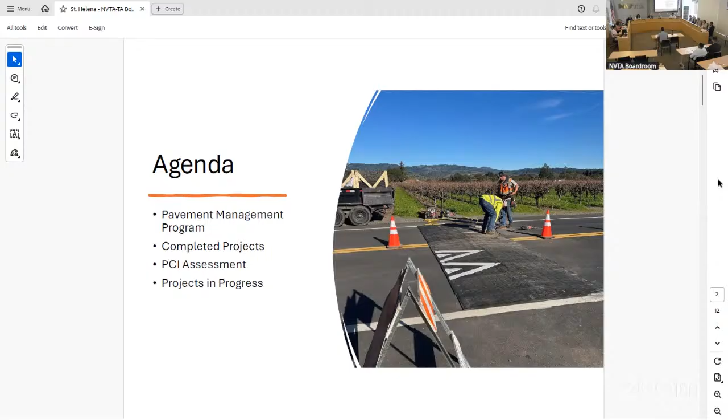Next slide please. Our pavement management program: in 2024 and continuing in 2025, we had a major reboot of our pavement management program, which has allowed us to complete a significant quantity of streets. The approach focused on alternating years of pavement overlay versus maintenance treatments. We've also helped our staff have a more robust maintenance and crack sealing operation, which is assisted. As we're moving forward with our pavement management strategy, we're moving out of a pavement crisis phase and looking forward to the future, utilizing Measure T, Measure U for significant projects other than just pavement, including Class 1 trails, storm drain infrastructure, and bike and ped facilities.

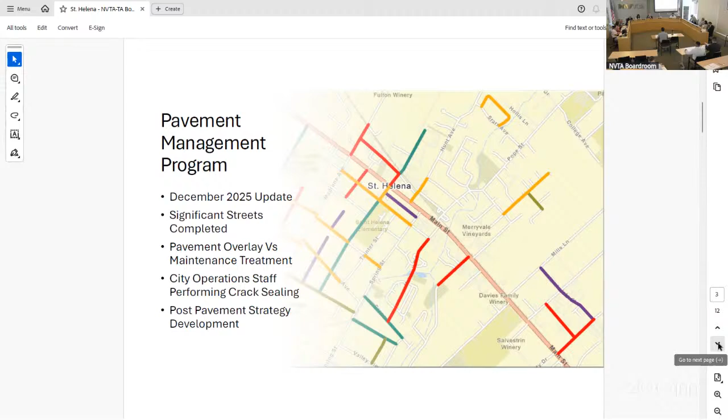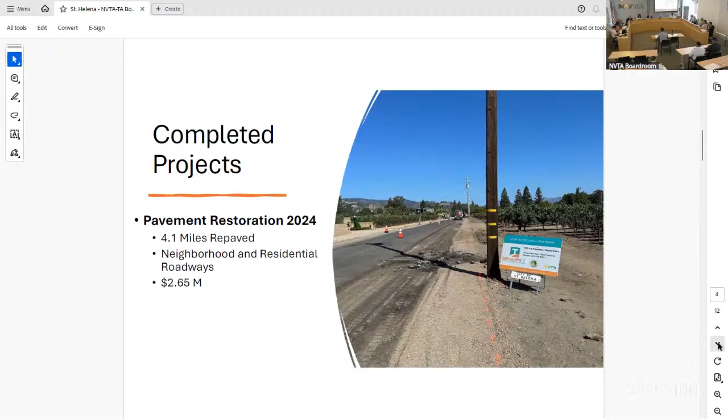Next slide please, completed projects. In late 2024, we completed our annual pavement restoration project. This was a pavement-focused year. We completed 4.1 miles of resurfacing within the city. We tackled quite a few neighborhoods as well as major arterial streets, and we focused on streets that had condition gaps within them. Altogether, the project was $2.65 million. Next slide please, here's a couple of pictures from that project as well.

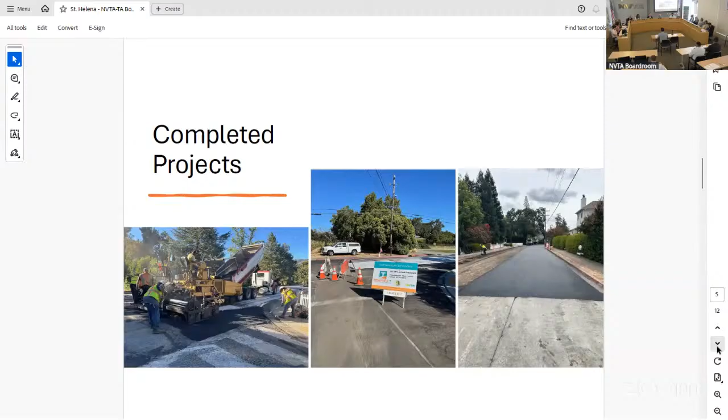Some of our significant streets: Hunt Avenue, Spring Street, amongst others. Next slide please. Another project we completed was our downtown sidewalk paver repair project. This project included removing and resetting all the pavers through our downtown corridor that had been uplifted due to tree roots, and that project came in at $365,000.

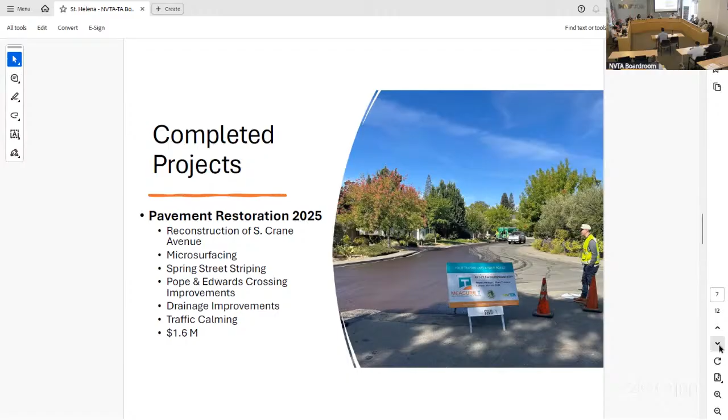Next slide please, we just completed our 2025 pavement restoration project. This was a more maintenance-focused project. The centerpiece of the project was the reconstruction of South Crane Avenue, which had not been resurfaced since the 50s, 60s. We expanded the roadway, added bike lanes. It was a really fantastic project. We also microsurfaced significant neighborhoods in town. We completed some striping projects, some pedestrian crossing improvement projects, and drainage components. It was kind of a big catch-all project. And we also deployed, for the first time in the city, traffic calming measures - speed humps throughout the city as a pilot program. This project was $1.6 million.

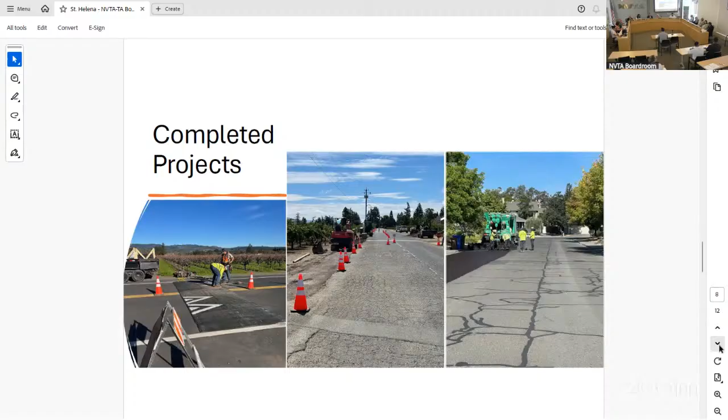Next slide please, here's a couple of pictures from the microsurfacing efforts, our South Crane Avenue resurfacing, and then our speed humps as well. Next slide, our pavement condition: we've had a significant increase from the beginning of 2023 till the end of 2024. We increased from 47 to 65. This was following our re-strategizing of our pavement management program. And last year, we actually were cited as most improved in the nine counties for an 11-point increase from 52 to 63, which we're excited about. Our targets are 75 to 80, which we do see as possible within the next few years.

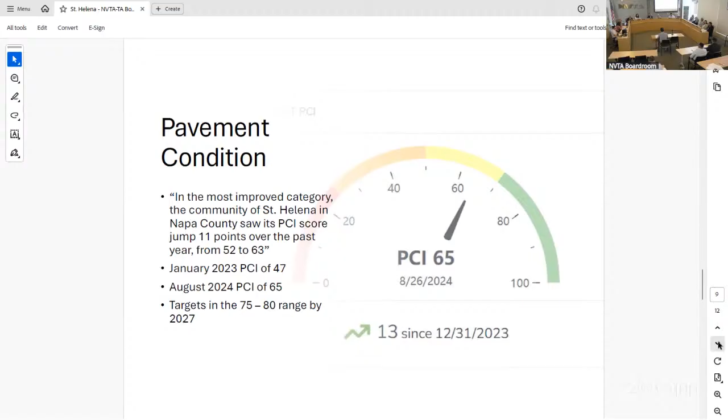Next slide please, projects in progress. We have some significant projects happening currently. We have broken ground on the downtown sidewalk rehab project, phase 1A. This is replacing the downtown sidewalks from Pine Street to Adams. This is going to include new curb, gutter, sidewalk, trees, furniture, infrastructure.

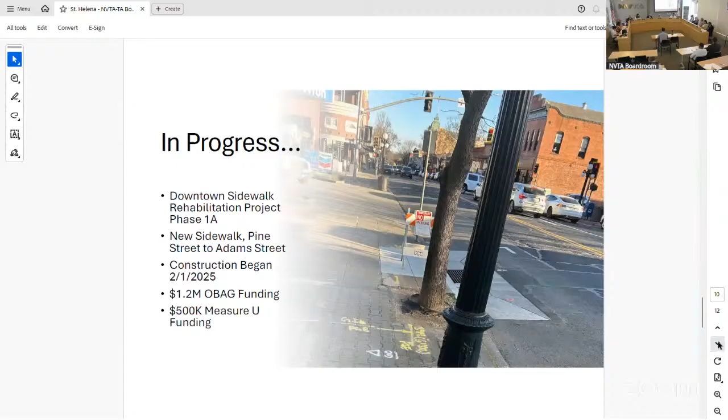And this project is primarily funded through OBAG, but with a contribution from Measure U of about $500,000.

We have a few projects that are shovel ready that we are preparing to move forward. We're currently installing new utilities on Oak Avenue through the whole corridor in preparation for a surface project, which will repave the road and replace curb, gutter, and sidewalk. This project will also coincide with the impending Vine Trail corridor through St. Helena. We are making preparations to possibly progress the downtown sidewalk rehab project, phase 1B, which will replace the sidewalks from Adams all the way down to Pope Street. We were encouraged by the cost we got from phase 1A and are looking at the feasibility of moving that forward. We're also going to proceed with a 2026 pavement restoration project.

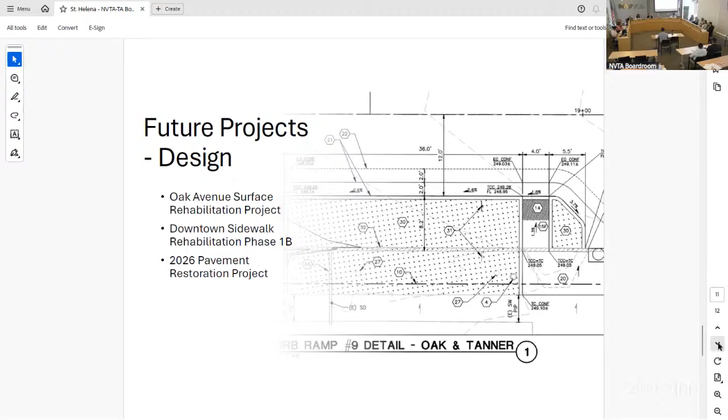Thank you for the report. Does the board have any questions? Yes, maybe I do have a question. First, I want to congratulate you on getting the PCI score up so high. I'd love to see that happen in the county. That's a big movement, big progress on your part.

You said you re-strategized your pavement program. Can you give me some of the key indicators that you found helpful? Certainly. For years we relied significantly on PTAP and the PTAP analysis, our street saver analysis. Working with that, adding extra review, and then having people who live in the city and work in the city speak into those models, we were able to take the computer model and work it more than we had in the past.

I'm just wondering if there's something other jurisdictions can learn from that, since we were able to achieve so much. And then, as I said earlier, we're grouping our maintenance projects, including microsurfacing, concrete repairs, and drainage repairs, into one project, and focusing mainly on overlay with as minimal concrete or extraneous work as possible during those pavement years, really utilizing the money for as much asphalt as possible.

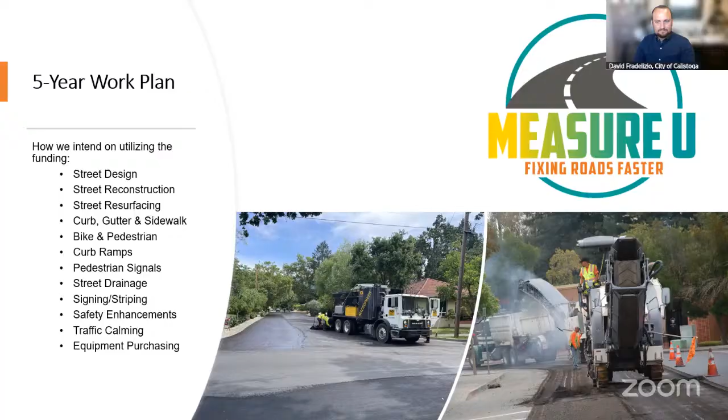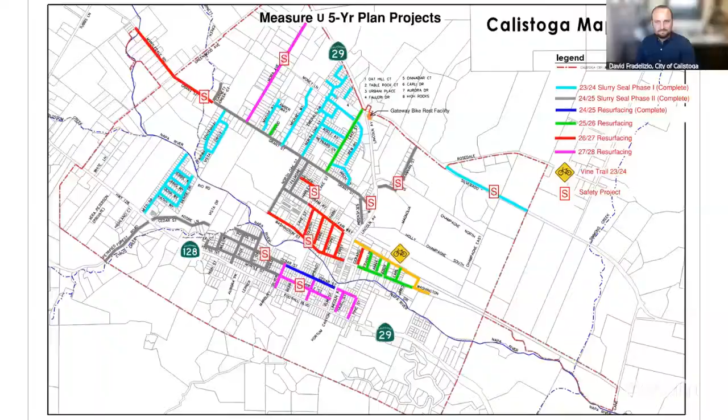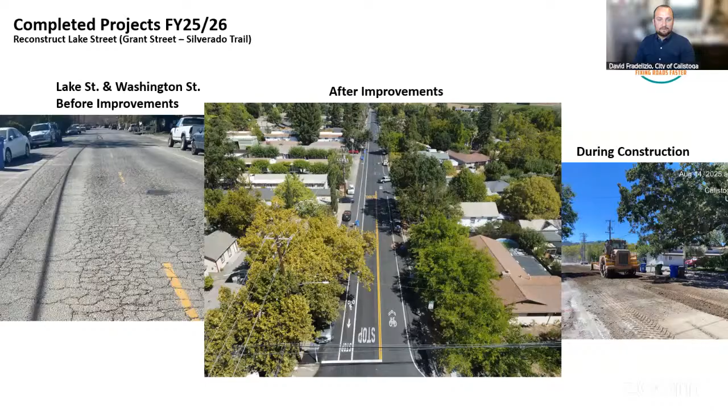We have reported about $400,000 of Measure U funding on this project, with a total project cost of $1.5 million. Projects like this are a good example of how Measure U funds help us address streets that have reached the end of their useful life. Next slide, please.

Next slide, please. In addition to Lake Street reconstruction, several other projects were completed this year. These include 2-inch grind and overlays on 6 road segments, installation of a flashing pedestrian beacon and crosswalk at Brannan and Lincoln Avenue, as well as design work for future roadway improvements. These improvements support both transportation safety and mobility, particularly for pedestrians and cyclists. Next slide.

Looking ahead to fiscal year 26-27, we're planning several potential projects. The primary street reconstruction project will likely either be Grant Street between Centennial Circle and the city limits, or Washington Street between 3rd Street and North Oak Street. We have 100% design plans for both of these projects, but final prioritization will depend on City Council priority and funding availability as we go through our budget season.

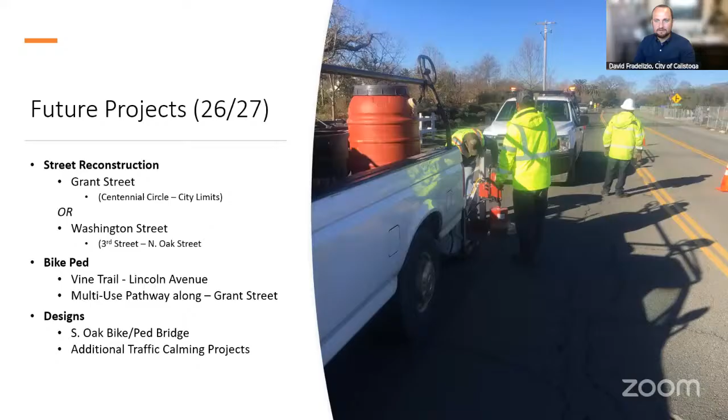For fiscal year 27-28, the city is planning the first phase of a larger pavement overlay project, and we're planning to use the Measure U bonding option to fund these phases. These phases will include overlay improvements on 15 streets. These types of pavement preservation projects are important because they allow us to extend the life of our streets and avoid the more costly full reconstruction earlier than it needs to be. We're also going to be considering pavement reconstruction work on Mora Avenue during this fiscal year, depending on how much is accomplished between Grant and Washington Street in previous years.

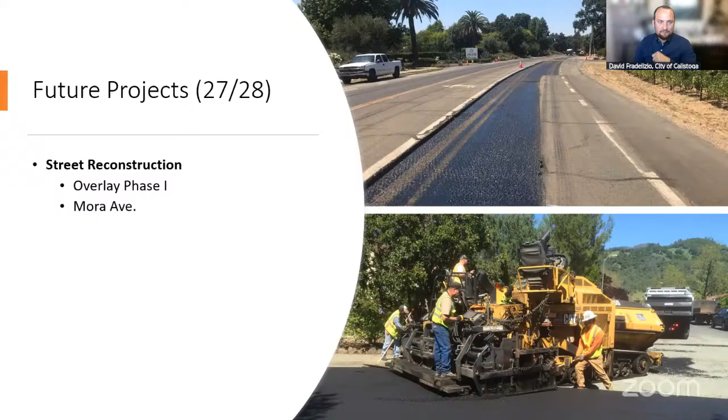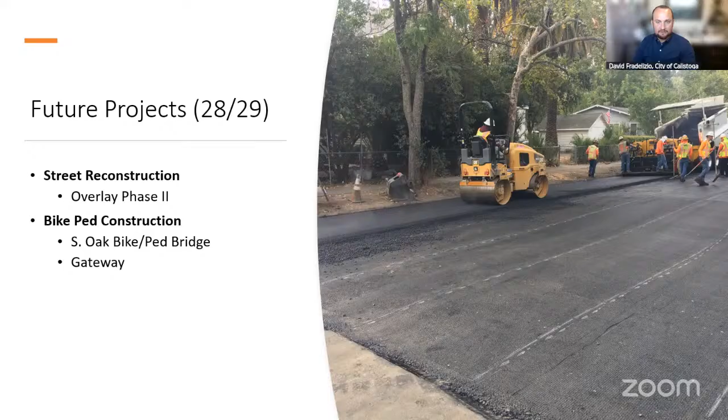And finally, for fiscal year 28-29, we'll be looking at the second phase of the pavement overlay project, construction of the South Oak Bike and Pedestrian Bridge potentially, and a potential gateway project, which we have 100% design plans for currently. These projects will help improve connectivity, safety, and the overall transportation network in Calistoga.

And last slide, please. So in summary, Measure U funding continues to provide an essential resource for maintaining and improving Calistoga's transportation infrastructure. The program allows us to address aging streets, improve pedestrian and bicycle safety, maintain ADA compliance, and plan strategically for long-term infrastructure needs. We appreciate the Napa Valley Transportation Authority Board of Directors and their continued oversight and support of the program. Thank you for your time today, and I'm happy to answer any questions if you have any.

All right, thank you. Does the board have any questions or comments? All right. Oh, Director Alessio.

If no one else is going to say anything, again, I want to commend Calistoga Public Works Department for the work you're doing in terms of increasing the PCI score and also being mindful about what I'm hearing and seeing is that we're all kind of on the same page about creating safe communities, multi-mode communities. And at the end of the day, we know that quality roads create happy residents, right? Or happy roads, happy residents. So again, thank you for the work. If I understand correctly, or remember correctly, I think St. Helena's PCI was at 65 and Calistoga 69. Okay, so the race is on. We'll have to see how the other jurisdictions are doing. So thank you and great job. Thank you very much. All right.

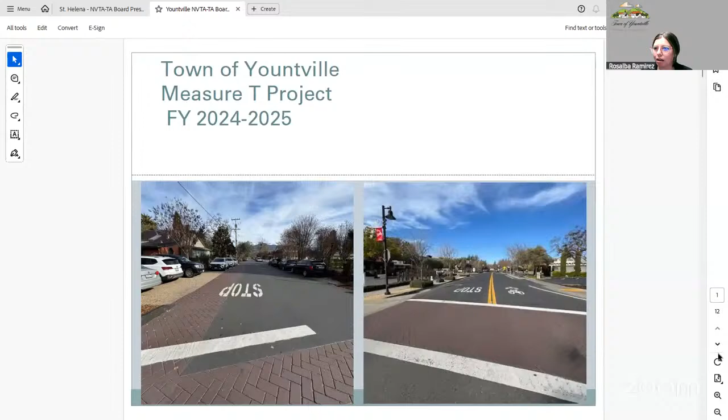Good afternoon, board members. My name is Rosalba Ramirez. I'm the Deputy Public Works Director for the town of Yountville. As soon as I can see the presentation, I will go ahead and get started. And I'll start presenting on the town of Yountville's official last Measure T project and kind of go over our plan for the future Measure U projects. Okay. Let's see, I think it's still, all right, I can officially see it now.

So this first slide, our last Measure T project, the last road rehabilitation project we completed this year was for Washington Street, from Yount Street all the way to the north town limits, and Webber Avenue, the full length, which is Vine Trail to Yount Street. On the Measure T 5-year list or plan that gets approved, both streets are split up into different segments, but because Washington Street is the main street in town and Weber Avenue, where it crosses Washington, it's such an active intersection, we decided to move forward and do the entire street as one project. So we were able to incorporate the various segments that are listed in the 5-year Measure T plan.

Before we started this project, Washington Street's various segments had varying PCI ratings. It was in pretty bad condition overall, with an average PCI of 65. Weber Avenue's two segments were in very poor condition, one side at 29 PCI and the other at 52.

At the end of the project, this pulled our town-wide average PCI rating for our entire roadway network to 82, which is the goal for both our Measure T and Measure U projects: rehab the lower-rated PCI roads first so they fall into maintenance, bringing up that overall PCI. Our goal is to maintain definitely above 80, ideally around 82.

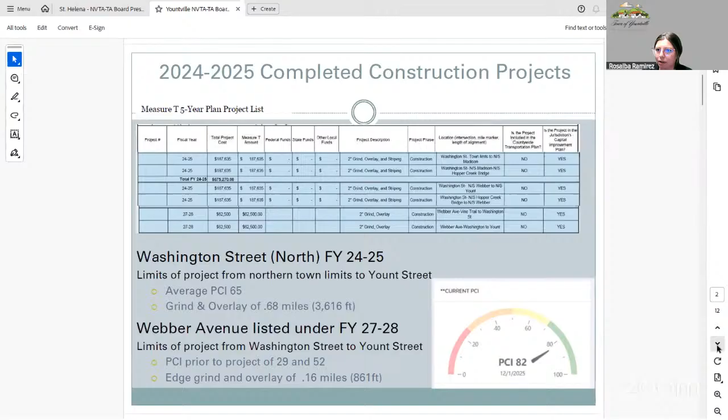The Washington Street rehab for Measure T was part of a larger project we call the Washington Street Corridor. It was the largest project we've had in a handful of years, even larger in scope and cost than the south side of Washington Street from Yount Street to the southern town limits.

For the Measure T rehab project alone, the work came to just over 1.2 million at the end. We did a standard advertisement, and the low bid came from a company called Goodfellow Bros. The project moved pretty quickly, and we were done about October 30th.

We did use other funds besides Measure T. We'd spent the last couple of years building up our reserves because we knew that if we did Washington Street, we wanted to get it done in one go, since all of our businesses and hotels are primarily on Washington Street. We used just over 1.1 million in Measure T funds plus additional general funds.

In addition to the roadway rehab work, we did some sidewalk, curb, and gutter work in advance of the project using SB1 funds and other general funds as well.

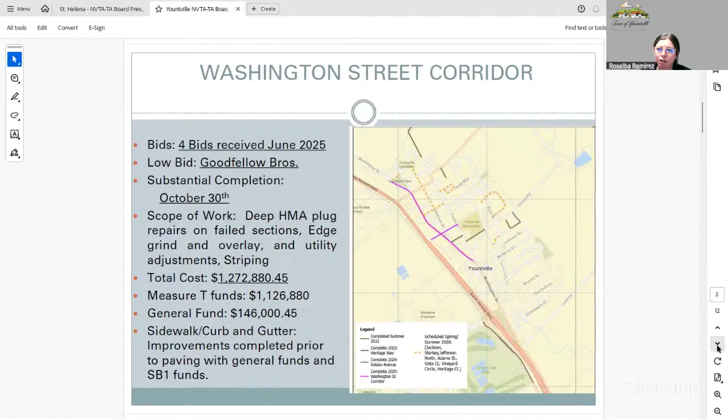Some construction highlights I want to touch on relate to our approach. Yountville isn't very large, and Washington Street is our main street, so we told the contractor that whatever segment they ground out had to be paved back that same day, to reduce disruption to businesses, hotels, and tourists.

They came back with a very quick schedule and were able to finish the entirety of Washington Street and Webber Avenue within five shifts, three days and two nights. For the night work, we coordinated with business owners to make sure it wasn't disruptive to hotel guests.

It was very impressive to see. Some businesses were amazed by the construction train, the grinding equipment up front and, not far behind, the paving equipment, so by the end of the work shift there was new drivable pavement.

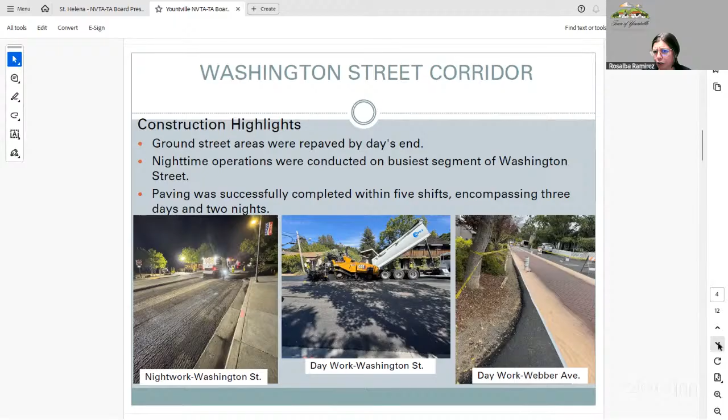These are some before and after pictures, showing just how bad the street was. Weber was significantly worse than Washington Street, shown top left, with the after photo just below it. We also show the red brick, what we call an advisory lane, which I'll touch on later; that was incorporated into Weber Avenue.

For Washington Street, I tried to capture photos of some of the areas that were pretty bad, so you could see how well the rehab brought the PCI up. Next slide, please.

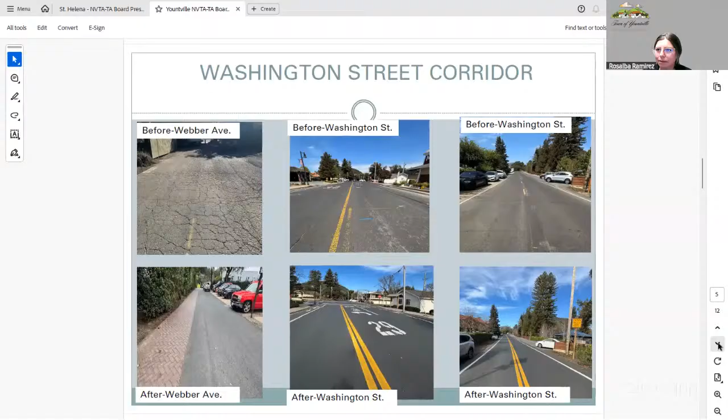So part of the Washington Street corridor project, which was the full rehab and sidewalk work, we closed some sidewalk gap closures. The biggest one was on Washington Street just south of Madison, in front of 2 businesses that have been there a long time. There was existing sidewalk just north of Pedroni, then a big gap in front of these 2 businesses, and sidewalk again just south of Madison.

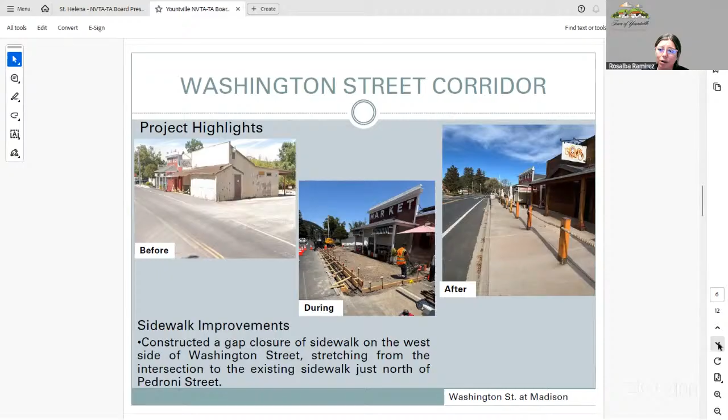So we went ahead and built sidewalk with the idea of inviting outdoor seating areas for the businesses, with standard curb and gutter. Because the businesses were older, we had to adjust the sidewalk in front of one of them since that building was significantly lower to accommodate drainage. So there's a transition where the sidewalk goes down, meeting ADA compliance and solving the drainage issue. We fixed that gap closure ahead of the paving project, so we're able to pave up to that new curb and gutter.

Some more project highlights, focusing on the corridor project. On the Weber side, you see the advisory lane there - it's the brick pattern Yountville has on crosswalks throughout town, a stamped brick pattern.

We created a pathway connecting from the Vine Trail down Weber, across the intersection of Washington Street, and onto Yount Street, to encourage pedestrians to use the Vine Trail and locate the center where Town Hall is - the Town Hall and new Yountville Commons amenities. Weber's not very wide, so this helps with the traffic we have there - a lot of vehicle, bicycle, and pedestrian traffic.

On the Weber and Washington Street intersection, it was a 2-way stop. We implemented a 4-way stop to allow for access on the advisory lane. There's a park right there in the corner, Van de Leur Park, that's also widely used. That's an improvement we're seeing a lot of benefits from at the moment.

We also put in additional sidewalk on Washington Street adjacent to the French Laundry Gardens. There was previously an existing asphalt pathway that wasn't in great shape and was no longer ADA compliant. So we put in standard curb and gutter on that section and sidewalk raised up to the top of gutter elevation. In one of the photos, you can see it's already widely used by tourists and residents.

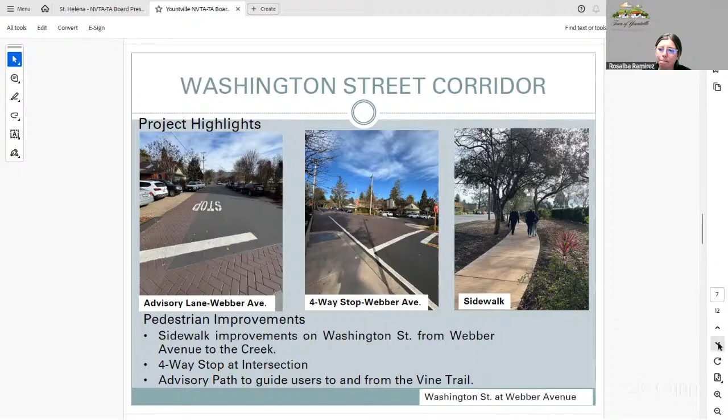As you go south, we started putting in sharrows to encourage bicyclists to use the roadway instead of the sidewalk, reducing conflicts between pedestrians and bicyclists. On Madison, although not on Washington Street or Weber, we were able to create buffer lanes to help those using Madison from Washington Street to Yount Street, then to Yountville Crossroad or Yount Mill Road, where we see a lot of bicycle activity as well.

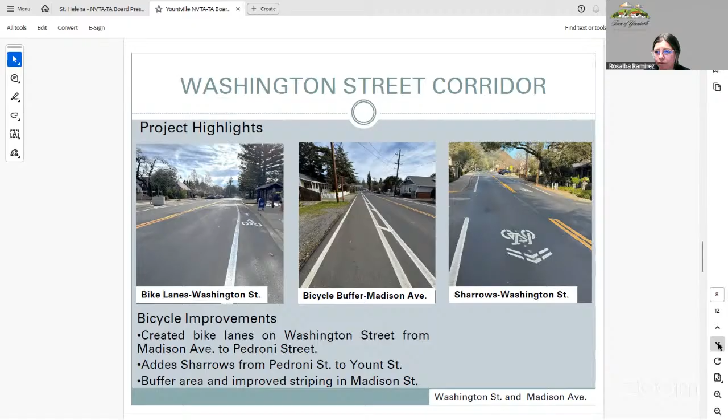Our upcoming Measure U list takes a similar approach to our Measure T, where we try to get the lower PCI rated streets rehabbed and those PCIs brought up, so we fall into more of a routine rotation of maintenance for our streets. However, we want to make sure any utility improvements or development projects we have going on don't conflict - we don't want to rehab a road if we know there's going to be construction in the roadway.

This upcoming year, we're doing some microsurfacing of streets so we can better analyze those larger streets and make sure we do roadway improvements after any other construction improvements happen. Again, the goal is to maintain that 82, definitely above 80, possibly higher PCI for the entire roadway network.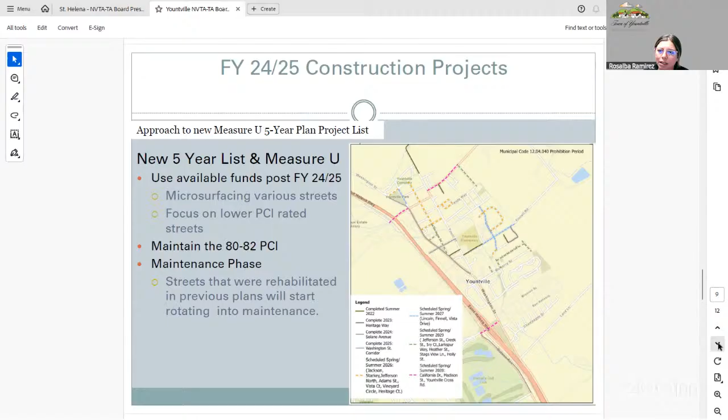This is probably not readable, but it is our full 5-year Measure U project plan list. We have a handful of micro-surfacing streets we want to get done within the next few months. We might have to swap out a few streets for ones later in the years just to avoid construction conflicts, but we plan on proceeding with the projects listed here in this order as best we can.

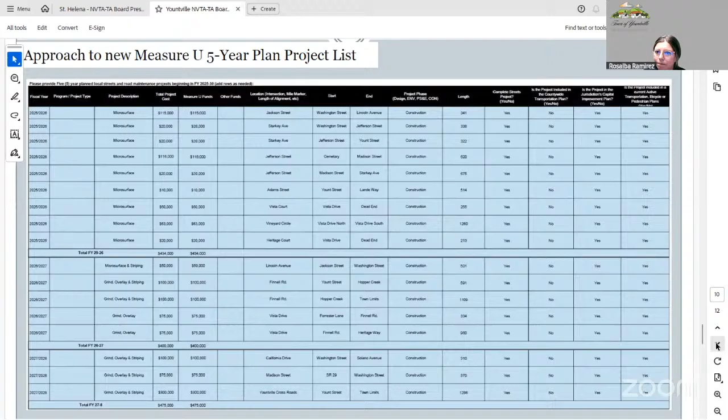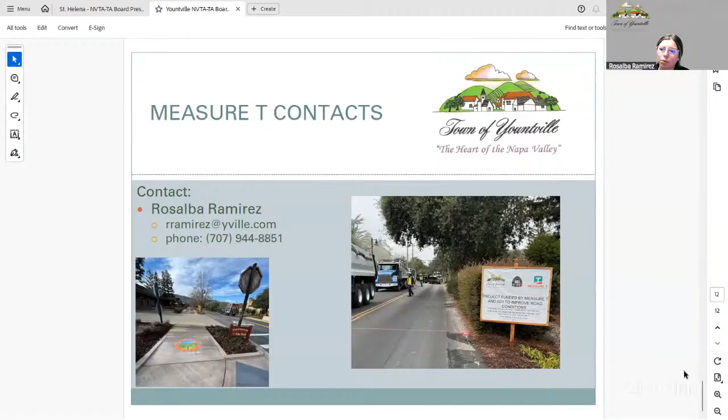Really quick, one of the photos here shows we put a Vine Trail logo on the sidewalk at Madison and Washington Street to help guide people to the Vine Trail entrance right on that corner. We're still trying to encourage pedestrians and bicyclists to find different ways to highlight those entrances, both on Washington and Madison, and Washington and Weber. Thank you.

There was some question about having a race for the best PCI results. I kind of think the town of Yountville won, but it's not over yet, we're not at 100. So thank you for the report. I'm probably providing you with a poor version of a compliment over how well you've done with your roads.

Thank you. Are there any questions? Yes, Director Reed. On that note, I just wanted to congratulate our Public Works Department and especially Deputy Director Rosalba Ramirez, because she pretty much made sure these projects came in at budget and on time. Actually, the timing of these projects was her idea, and it came together quickly. We were all sort of steeled for the Washington Street paving especially. So the job she has done for us has been very appreciated by all the residents and businesses. Thanks. Okay, thank you. Any other comments? All right, thank you again for the report.

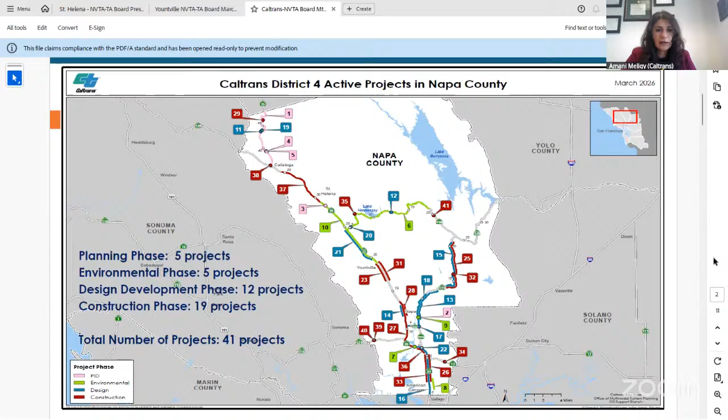I'm reporting the status of this emergency director order, which is the sinkhole culvert scour repair on State Route 29. This was based on recent communications between the board members and elected officials with teams from Caltrans to address concerns from the community surrounding the project limits due to the current daytime one-way traffic control.

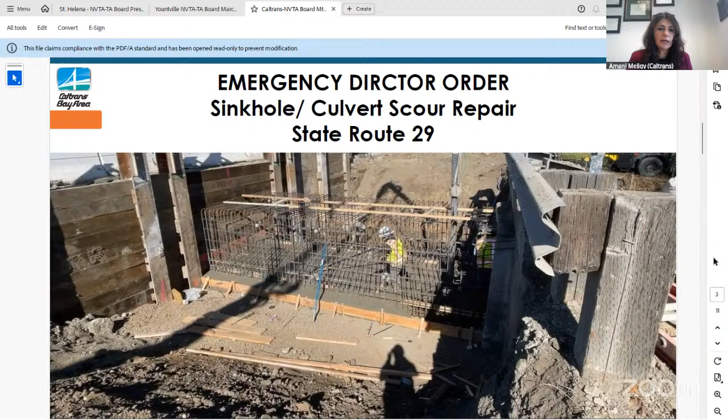This director order project is located in Napa County on State Route 29, midway between Oakville Cross Road and Rutherford Road and State Route 128. The Caltrans District Field Maintenance identified a dip or depression in the roadway at post mile 23.54, and reported it to the District Maintenance Division. This was on September 10, 2025.

The nature of this work is an emergency need for this director order to eliminate any potential failure of the culvert in this section of State Route 29, with the risk of long-term full closures if this is not rectified.

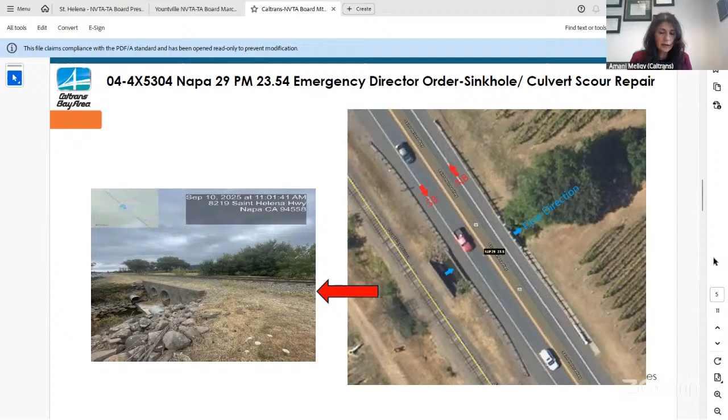The photo on the right shows State Route 29 with northbound and southbound lanes. Currently for construction, we are in stage 1 of culvert repair. The northbound is closed for construction, while the southbound is used for reverse traffic in both directions. The photo on the left shows the collection basin that collects water going to the culvert underneath the roadway, flowing from upstream to downstream.

These pictures were taken in September 2025 and show the extension of the scour damage at the north side and south side of the culvert. This is due to erosion of the soil around and underneath the foundation. You can see this void caused a deficiency in the structure with potential for collapse of the culvert.

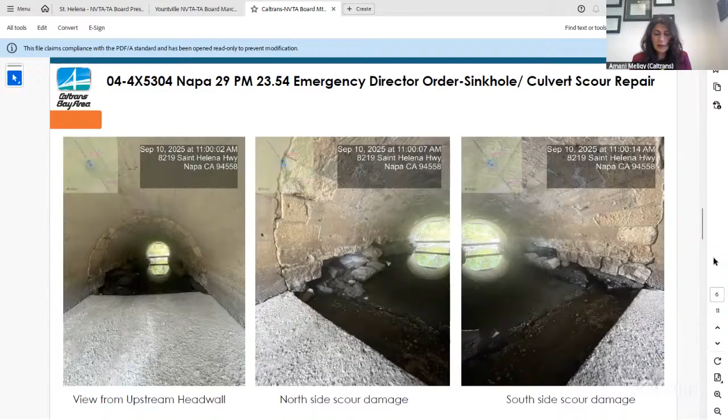However, in February, after dewatering to lower the water level in the culvert, PG&E was not successful in abandoning or cutting the gas line and had to revisit their plans. They later managed to successfully remove or abandon the gas line. This was the first constraint for construction.

The second constraint was the weather condition at the beginning of the year, with heavy rains that stopped construction because they needed three consecutive days to construct the sheet piles and the K-rail.

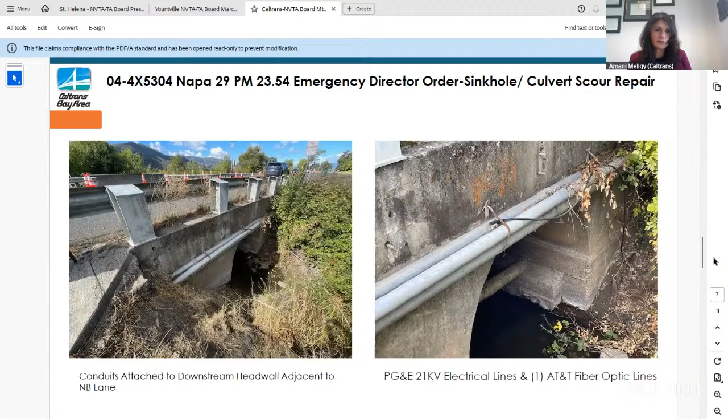This director order is in the amount of 1.9 million dollars, funded from the SHOPP emergency opening funds, with a total cost of 2.8 million. There may be a request for supplemental funds if this amount is not sufficient. Construction began January 12th of this year, with tentative completion by May 21st. The scope is replacing the existing 8-foot diameter arch culvert, built in 1953, with a cast-in-place 8-foot diameter concrete box culvert.

This work is currently ongoing, and the traffic advisory, which was sent yesterday, shows that the work will be completed by March 24th.

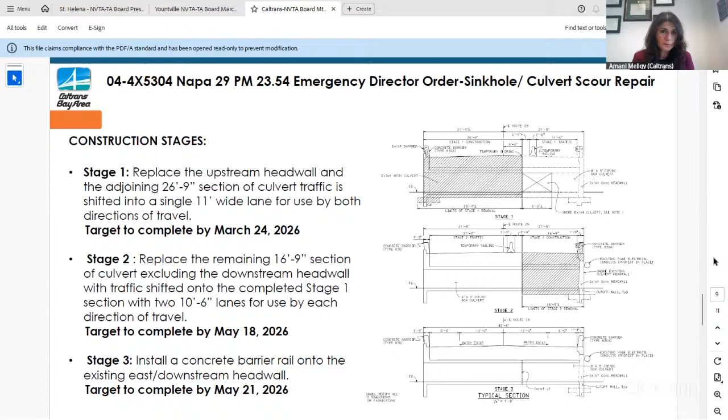Where we stand on traffic control for stage 1: currently there is a continuous one-way reverse traffic control. This will continue up to next Tuesday, followed by full lane closures between 10 p.m. to 6 a.m. Tuesday night to transition from stage 1 to stage 2. After that, the 2 lanes will be open to traffic starting Wednesday, March 25, after completion of stage 1.

Detour routes are indicated from northbound towards St. Helena, Calistoga, and also from State Route 29 southbound toward the city of Napa.

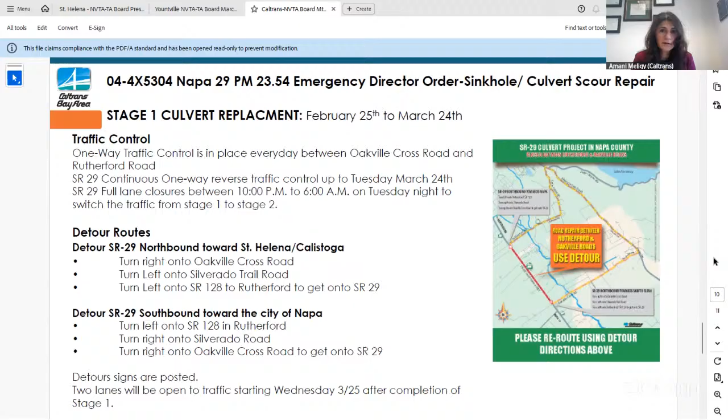By this, I conclude my presentation, and I'm happy to take any questions. Thank you. All right, thank you.

Anyone impacted by those improvements? Any comments from the board or from the public? All right, well, thank you for the update.

And it looks like March 24th is the date we can expect to see the 1-lane stop-and-go go back to 2-lane. Yes. All right, well, thank you for that report.

We now have no presentations. We've already gotten some already. So let's go to consent.

We have a number of consent items. Anyone want to pull them? If not, I'll entertain a motion to accept our consent calendar. Second. Narvaez and Washington. All in favor, say aye. Any opposed? All right, perfect.

We are on to regular agenda items. We have one: Strategic Plan Development Consultant Contract Award.

Director Schmitz: Item 10.1 is approval of selection of Innovate Mobility to provide the strategic plan development services and authorization of a contract not to exceed $109,832.